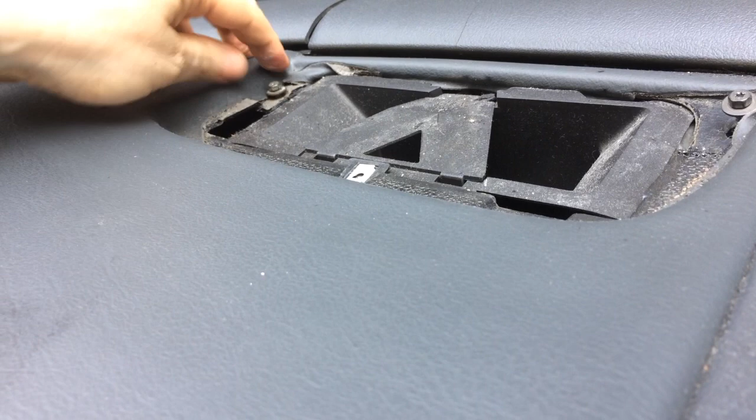I'll get these the rest of the way out myself in a minute, but you get the idea. I'm going to remove these two here, and then on the side out here there's a panel we're going to remove. That access panel just comes off, and that's going to give us access to this Torx screw here.

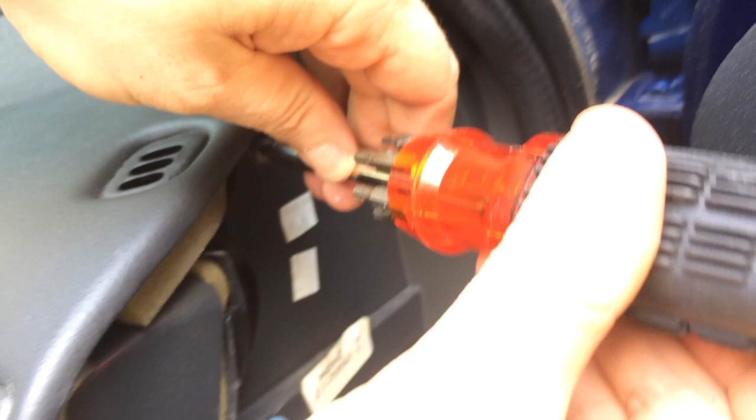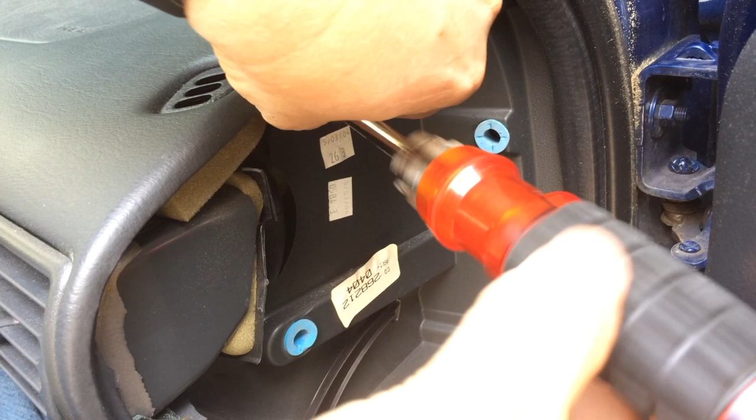Then we're going to do the same thing on the driver's side with respect to taking off this access panel and removing the Torx screw that you find there. I'm not necessarily going to show you that side, I'll show it to you after I'm done. I'm going to remove that panel on the driver's side, take the screw off over there, finish taking the two I loosened up over here, and then we'll come back because we're going to proceed into the glove box next.

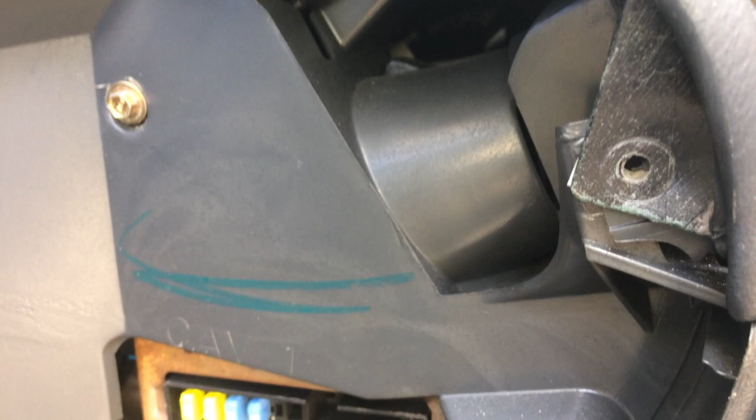Okay, this is just a view from the driver's side. When you come in here, you'll notice there's a screw here and a screw here. It's this one on the edge that you want to take off, because we're trying to get where we can lift this panel up. So I've got this guy out.

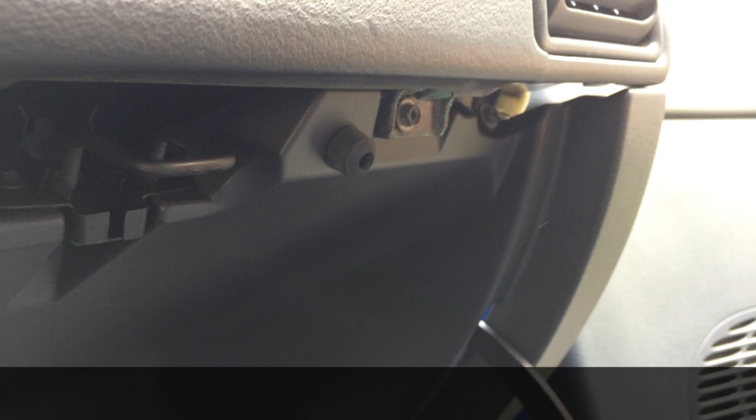Now we're going to proceed into the glove box area. In the glove box, there's a couple of screws we're going to remove, right here and here. There's one directly under this AC vent, and one right next to it to the left. Again, we can use our T15 socket to get these out.

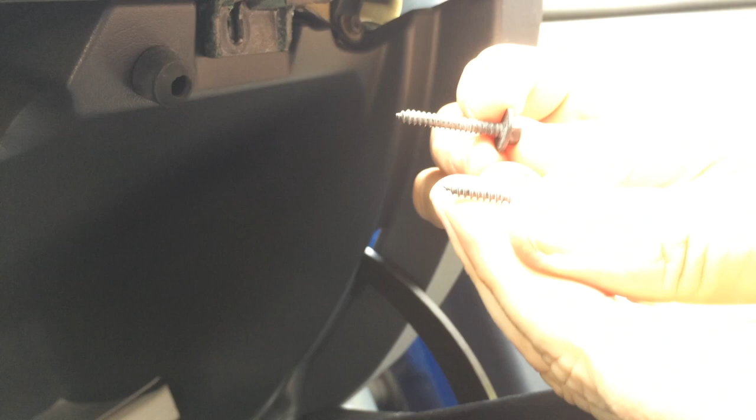Before I forget, after I get these guys out, I didn't show you when I finally removed those ones on the upper dash. When they come off the upper dash, the one on the right is the longer one, and the one on the left is the shorter one. Again, these were the ones that came from the upper defroster duct on the dash.

All right, so this guy's off, and now we're going to take this guy off. Now you don't have to use a T15 here, you could throw a socket on these. They are hex-headed screws.

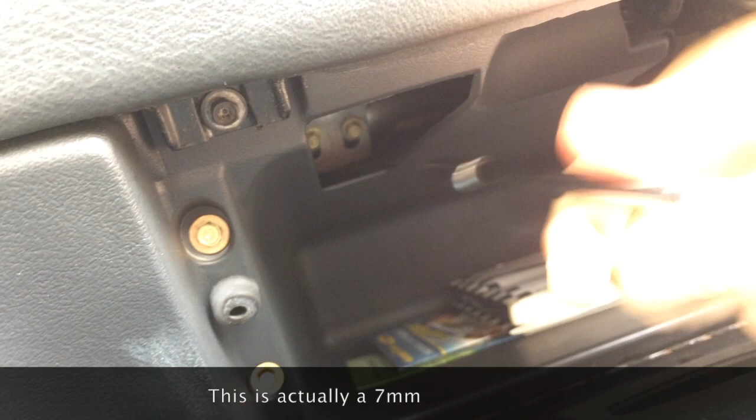All right, now with that out of the way, there's a couple of bolts that are right here, 7mm, 1 and 2, and these are the next two we're going to want to take off. I thought I had the right size socket on here, but I didn't, so let me go change my socket and we'll come back.

All right guys, I misread that. It's a 7mm socket, so I just had to change from the one I had to a 7.

Now, I'm not going to take these all the way out because I'm filming and I can't see them well with the camera in front of them, and I don't want them to fall behind here. So I'm just going to loosen them up, then stop the camera and get in here to take them out by hand. I've got a little magnet in case I drop them so I can fish them out. All right, that's the deal here. We're going to take these two guys off.

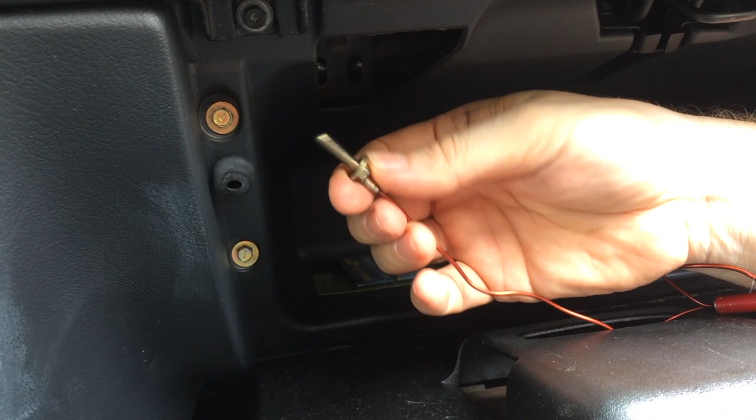So all right, guys, I've got this out. Basically what I do is loosen it up by hand, and as I take it off I use a remote magnet to hold onto it, just to make sure it doesn't fall back behind the dash. All right, so with that taken care of, the next step is to remove this top piece.

And I've got my prying tool that I'm going to use to do that. It's basically just some little latches that you pry up. You can see them right here, these little studs, and they go into these little holes. Again, we just want to go nice and slow because of how everything's kind of cracked from the plastic over the years.

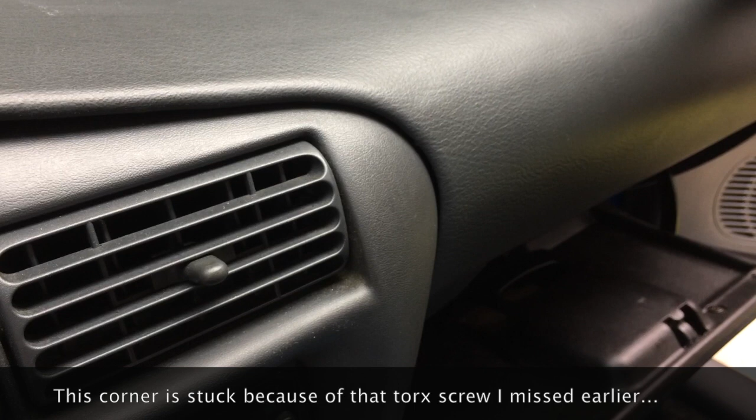This side's loose over here, and whoops, I did forget one screw on the far left above the glove box entry. So whenever you're doing something like this and it feels hard or stuck, I never force it. I always just go slow, and if I feel resistance, it probably means, like what I just saw, that I forgot something.

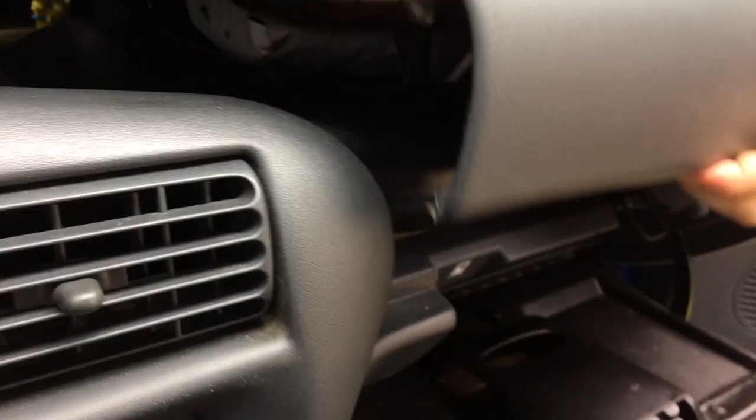Okay, so got almost all of these out. There we go, last one. So we're going to take this whole dash piece off and set it aside out of the vehicle.

And then with this out of the way, we're finally almost in a position where we can get at what we need to get at here, which is this front piece. Now this guy's held in by some additional screws. You can see one of them right here, and again it's the same kind of T15 deal. So I'm going to remove this guy.

And then we just have to go around and see which other ones we have to remove like that. There's going to be some more clips, and there's another one right up here on top.

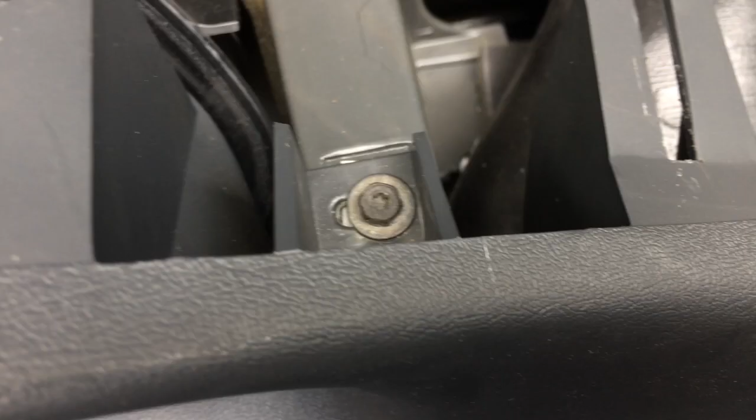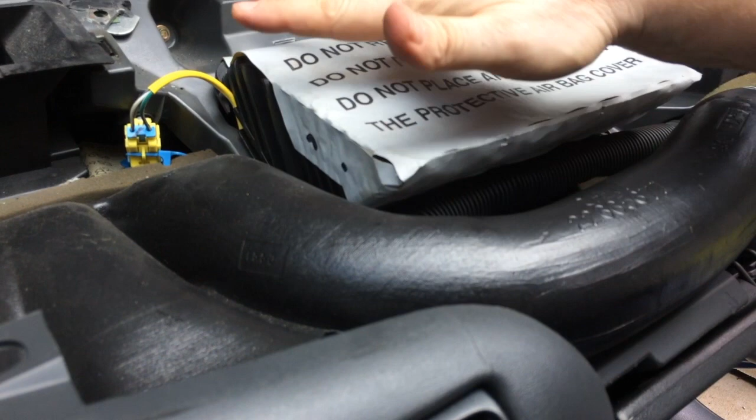Another thing I'd tell you while you're in here, I didn't disconnect the battery because you don't normally need to bother with it on this procedure, but make sure you stay away from this passenger side airbag. Don't leave any tools on it, don't lay anything on it that might trigger it. Just a good best practice.

All right, so now I'm going to come over on the other side and see if we have another screw holding this piece on. And yes, we do, right here in the corner. In the far corner, there's one more. Okay, and with that guy out of the way, we should be able to remove this trim piece and get access. Yep.

Okay, so now actually comes the hard part. You're going to have to reach behind here, and I'm not going to be able to show this very easily. I'm going to have to reach behind here and disconnect the headlight dimmer switch and the cigarette lighter. So let me pause for a second and get those disconnected.

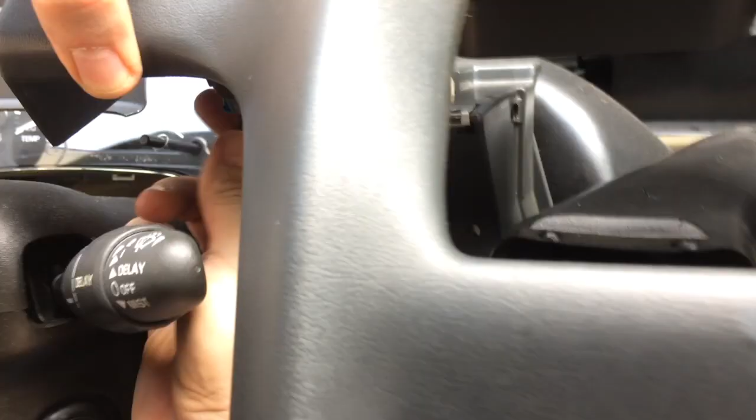All right, guys, I got the dimmer switch off here. The last thing left is this cigarette lighter. I've popped it out of the bottom clips here and here for this piece. And then with this guy, when you've got it in this position, there's a little knob on top, or a little lever, you just give it a squeeze. Right, you'll feel it right there, right? This guy right here, and he comes out.

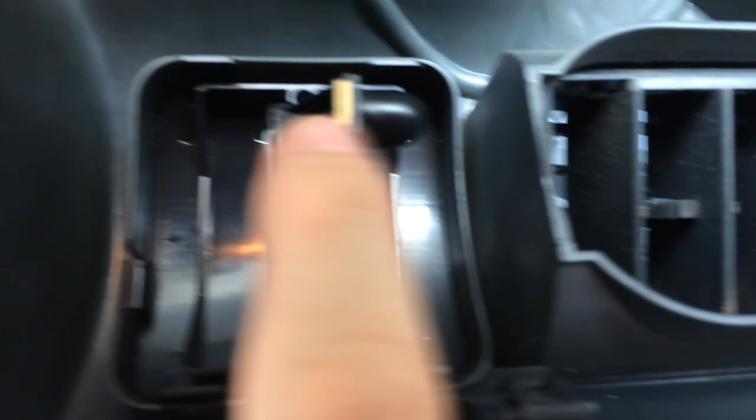And with that out of the way, you can remove this. The way I got the dimmer switch to release, if you look at the other side here, you can see this little clip. There's a notch on this card edge connector, this guy right here. All you do is lift that notch up very carefully so you don't break it, so you can clear the little tab that's retaining it. And this guy will come right unplugged, because it's literally like an old-fashioned card edge connector. I don't know if you can still see this, but that's the deal here.

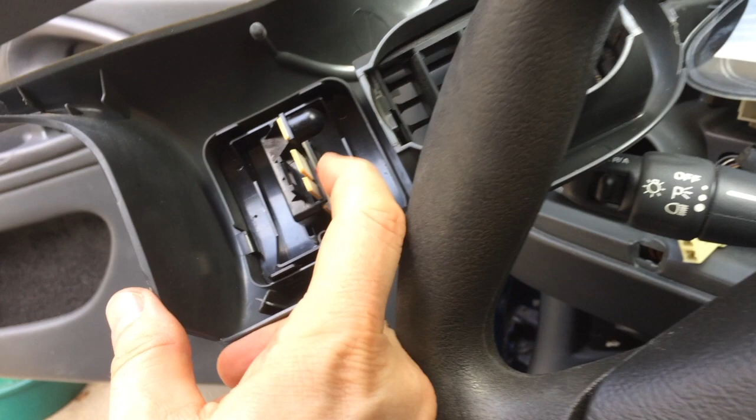All right, so this guy we're also going to set aside away from the vehicle. And again, be super careful. As I was taking this off, I noticed it's got the beginning of a little crack starting right there, and I managed to not break it or cause it to get any worse. So it's just part of what's going on with these Cavaliers when they get this old.

All right, so all we have left to get the radio out is we've got 2 screws here and 1 screw here. So let me set this dash panel aside and we'll pull the radio. All right, let's take this set of screws off so we can finally get this radio out.

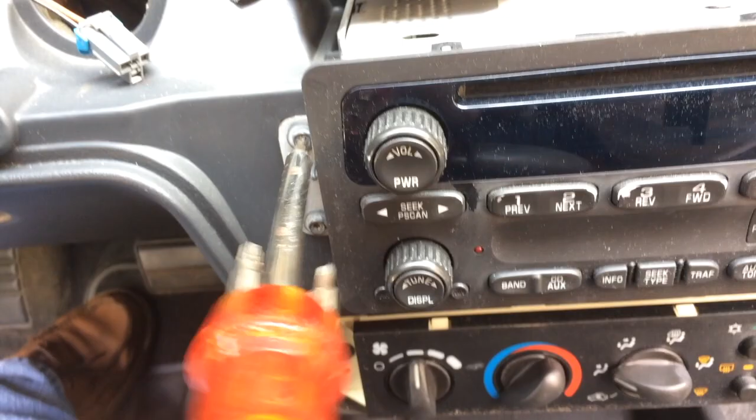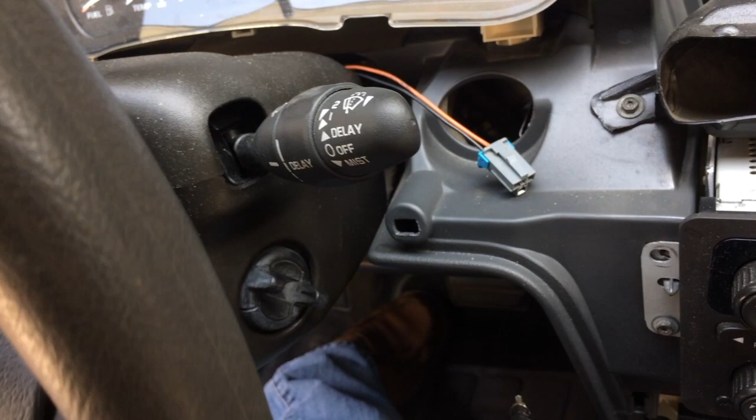Another thing I didn't mention on the previous piece: when you're getting ready to remove this dash piece, if you've got a tilt wheel, go ahead and tilt it all the way down. Makes it a little bit easier to get the clearance and put less stress on that plastic.

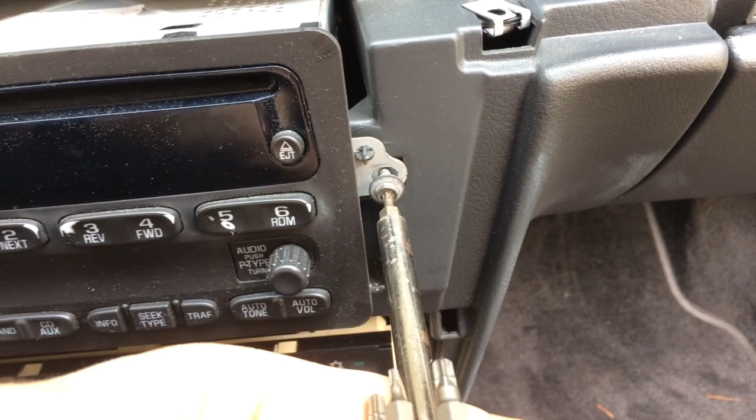All right, so this guy is almost out here. And we got this guy. This is the factory original radio from 2004. It's like the mid-range radio.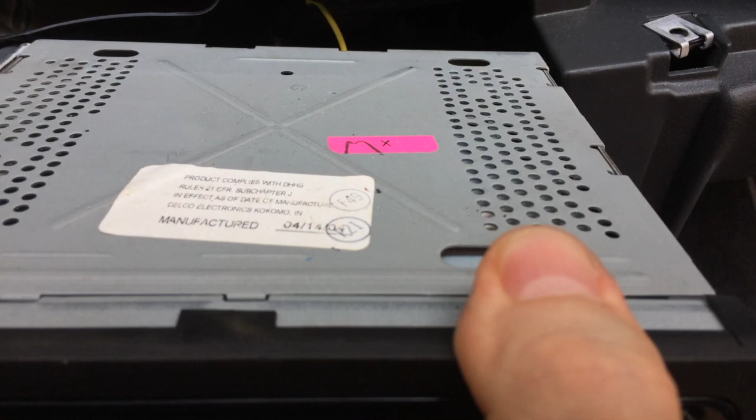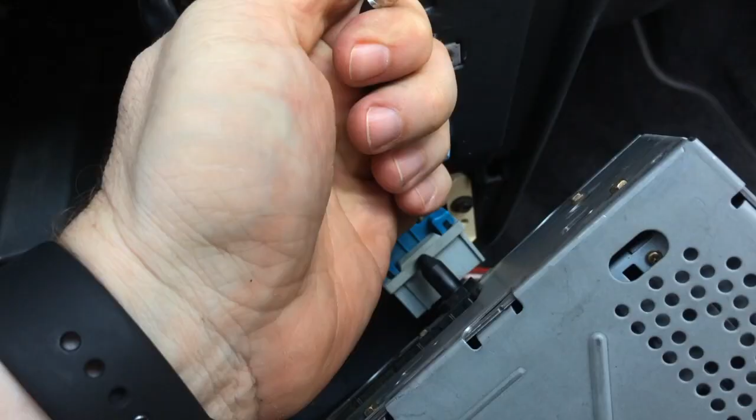Okay, this guy comes off, and then the owner of this vehicle actually has a third-party attachment here in the back. Let me just get this stuff unplugged first. You just give these guys a squeeze, just like you see here, and they come off. And then the antenna just pulls straight off like that. That's the same kind of connector since like the 1940s, no change at all.

So what we have here is the owner has gotten a device that plugs into the back of the radio that is used to allow you to have an auxiliary input. And we're going to have to remove this, because you can't have anything like this plugged in while you're trying to unlock the radio.

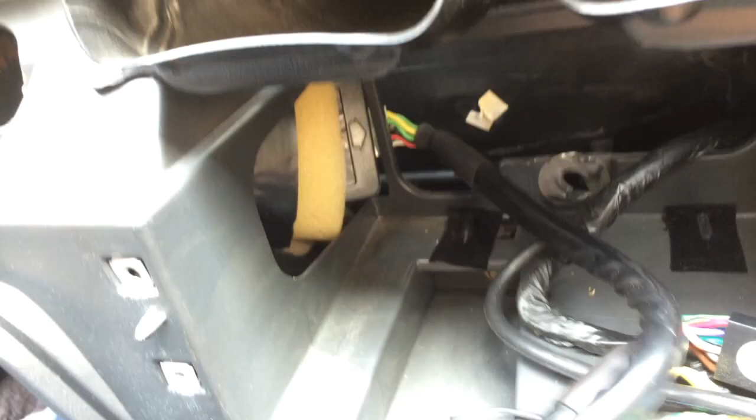We're going to be using a Tech2 GM tool today. This thing's wedged in there pretty good, I have to figure out how I can get in there and get it out. But we're going to unhook this so that we just go back to the original harness.

It looks like this guy is spliced in here. I thought it was just a plug-in kind of thing. Well, we may have to just leave it unplugged like this and just leave it be to get it hooked up. I'll have to take a look at what this is, because this isn't a factory deal here.

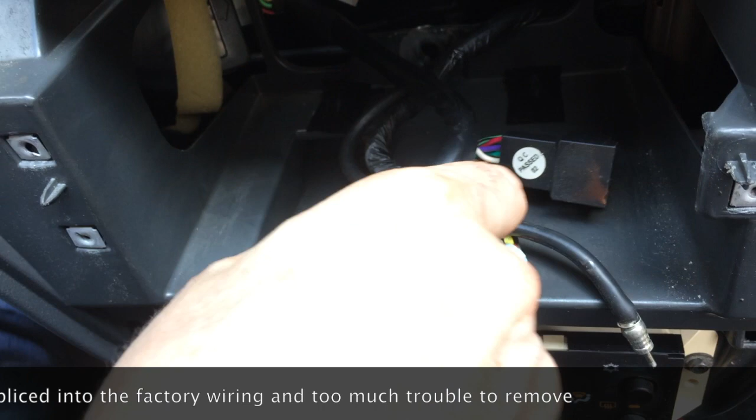All right, so let's take a look at this radio alongside the new radio and we'll talk about what we're going to do. All right guys, before we put this new radio in, I want to show you some information about how to pick the right upgrade radio.

I'm going to go to something called the GM Heritage Center, and I'm on Google here. This is all you need to do here for Cavaliers. The GM Heritage Center is for car collectors and people restoring classic cars or older cars, they archive information. This is a 2004 Cavalier, and 2003, 4, and 5 are the same model series, actually the last run of the Cavalier.

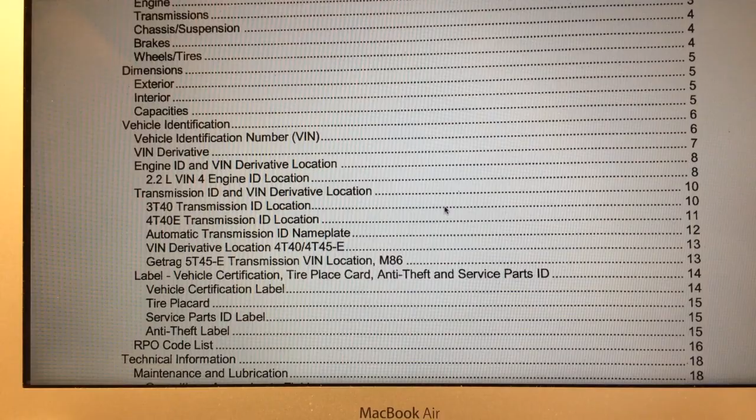So I'm going to pull up the 2005 Cavalier package. This package has all kinds of information about the Cavalier, and what we're particularly interested in is the radio options. In order to be able to unlock this stuff using a GM Tech2, we have to use a radio that was originally available at the time the vehicle was in production.

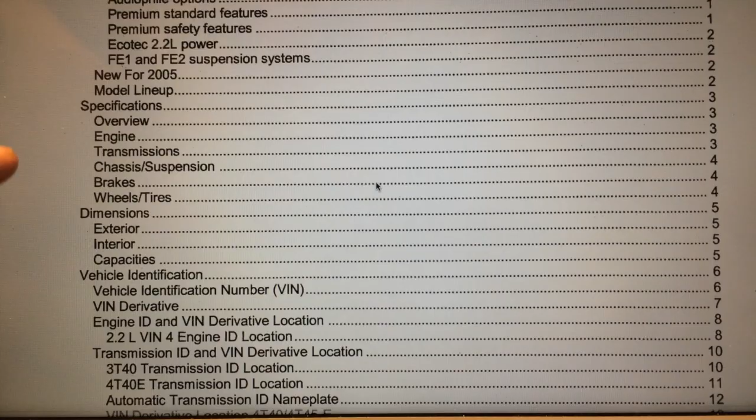So what we're looking for here is where the RPO codes are. Here it is, the RPO code list. RPO stands for Regular Production Option, and these are the codes that were used by the dealer to place an order for the vehicle, either one that they ordered themselves and you bought off the lot, or that they ordered for you.

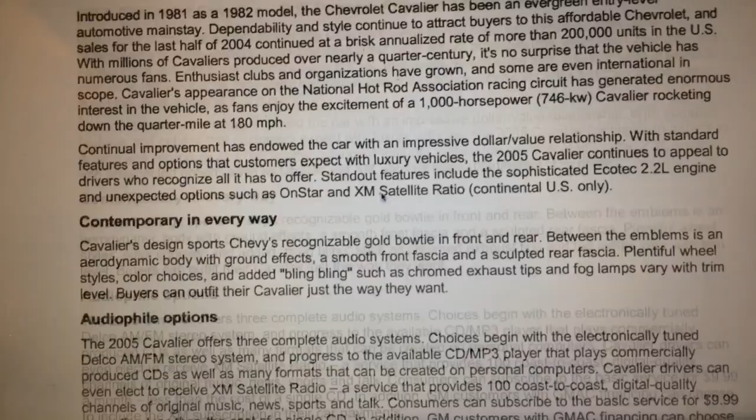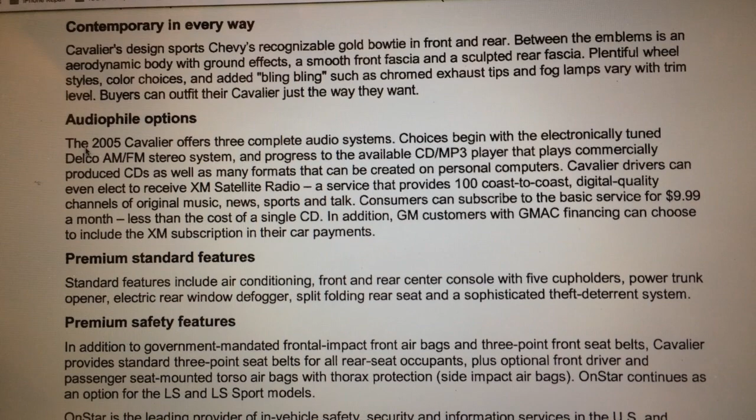So I'm going to come down here, I also should see in the introduction section a little bit of information about the radio itself. Here we go, Audiophile options. The 05 was the last year of this series, and this one would be compatible. So they tell us there's 3 radios that were offered: a plain Jane AM/FM, an AM/FM that has a CD player, and then there's an AM/FM CD with an MP3 player. So those are the 3 tiers.

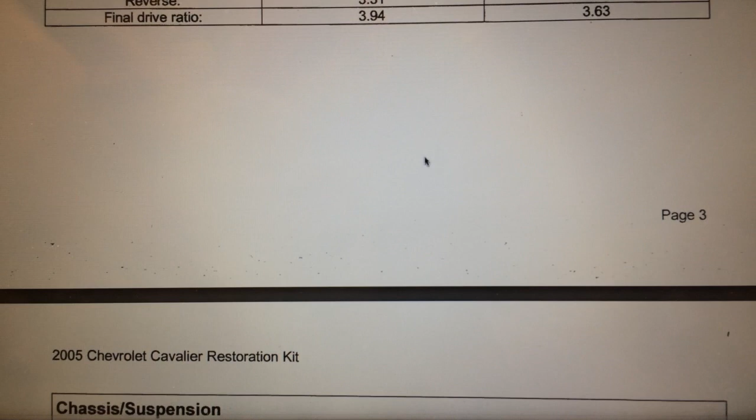If we take a look at the actual options, we don't count XM radio, that would be something you'd see called a digital radio receiver or something of that nature. We're just looking at standard radio. We're going to go down to page 16 here of the RPO list. Just give me a moment to find it... scrolling really slow... here we go. This is the RPO list, right? These are all the options on the vehicle, all kinds of stuff.

We are interested in the radios, which are going to start around letter U. Okay, so there's actually a mistake on this. UL5 is actually radio delete, meaning the person ordered the car with no radio. That's something you might see on a fleet vehicle or a government vehicle.

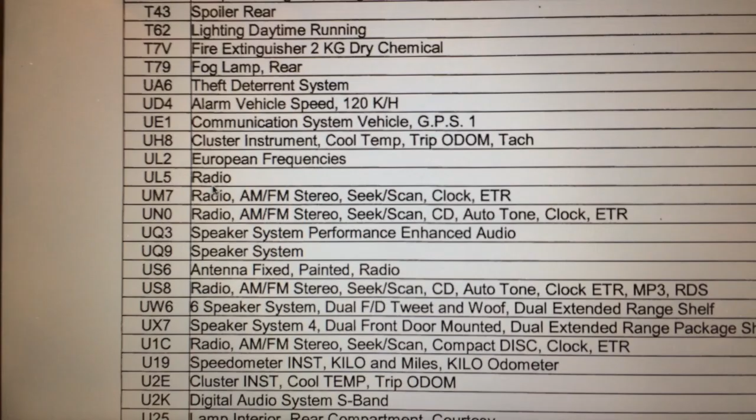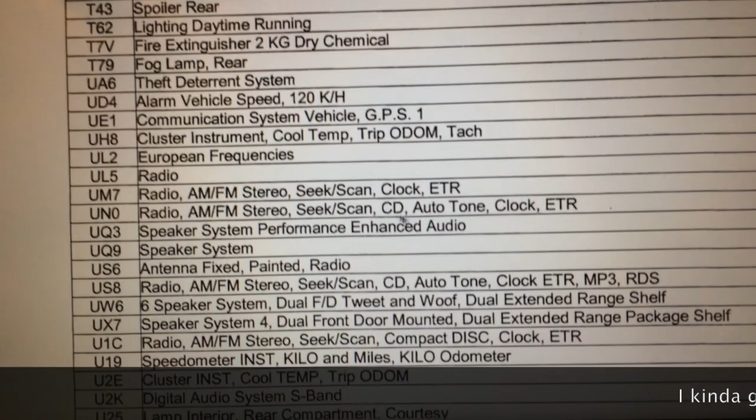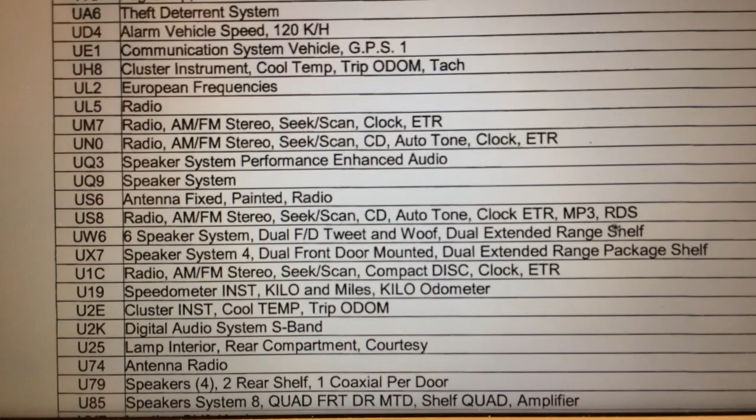Then we see UM7, which is a standard AM/FM stereo, and UN0, which is AM/FM stereo with a CD. We see a few speaker options and the radio antenna that sits on the back quarter panel. Here we see US8, the top radio: AM/FM stereo, CD, and MP3 capable. So US8, UN0, and UM7 are the 3 types of radios.

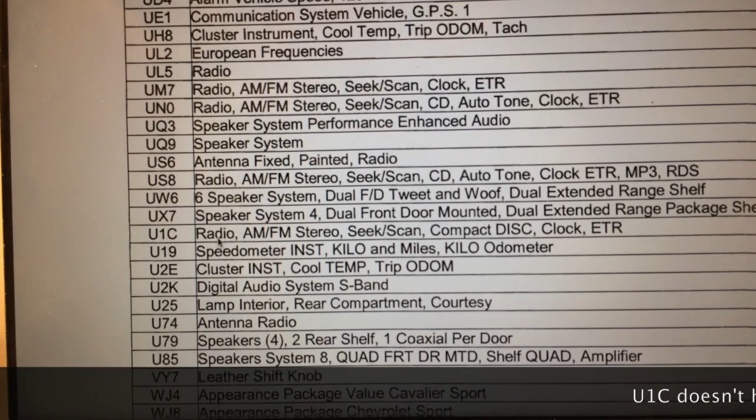Now you'll see sometimes some other radios listed, and you'll notice they'll end up having the same description. This U1C is actually the same description as UN0, so it doesn't count as a separate radio. Digital audio is our XM radio receiver, if the vehicle had that.

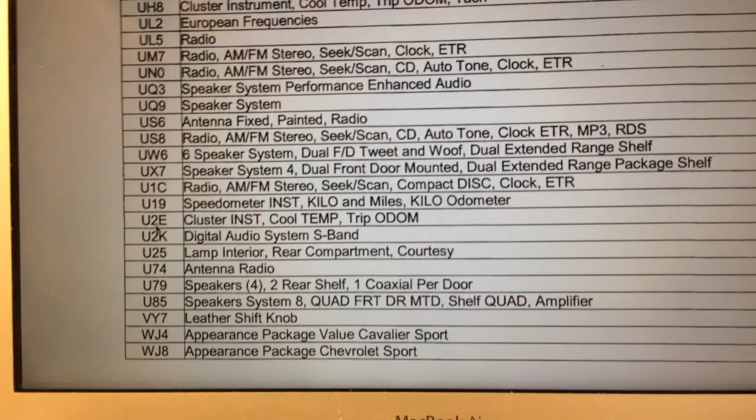So now we've got what we need. Why do we want these codes? Well, we've got to find part numbers to order the radios. I like to use GM Parts Giant for this kind of stuff, and now knowing the options, I can see the different radio part numbers.

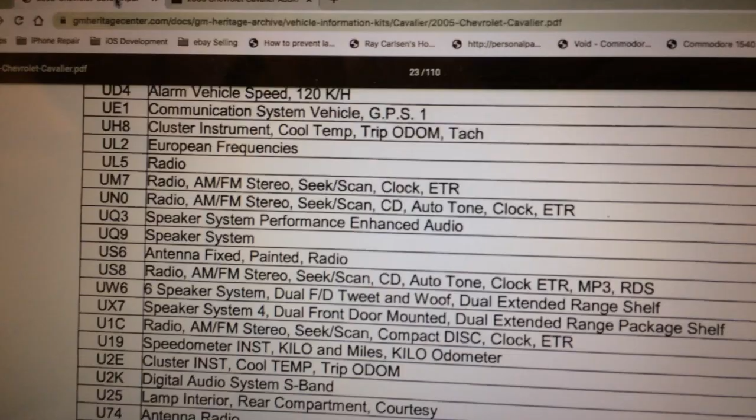So here's a US8 radio, part number 103-48717. This was the top of the line radio, right? So if we go back to our RPOs, we know US8 was our top of the line MP3 player radio.

And if we want to see where our UM7 and UN0 radios are, here's the UM7. Here's UN0, and I'm looking at UN0 here. I'm sorry, I read it wrong—UN0, that's what I was looking at. So we've mapped all 3 RPOs, UN0, UM7, and US8, to part numbers.

So now if we take a look at the radio that came out of the vehicle, we can see that this is part number 103-35223. Now sometimes you'll find these numbers don't match up to what's over here.

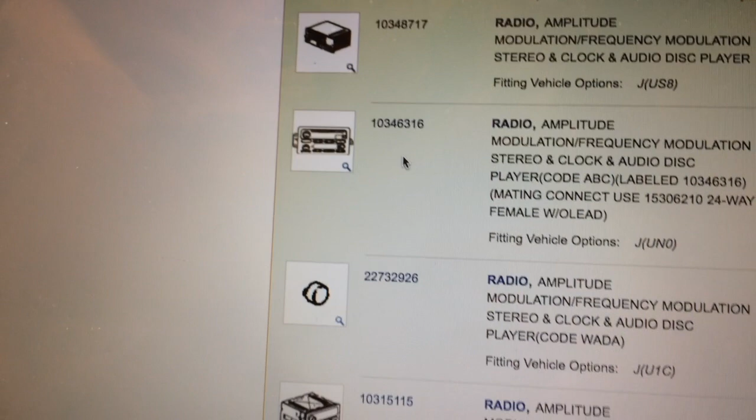So I know that this is the mid-level radio because it has a CD player, and they're showing a 103-46316. This is a superseded number. This is the original number that went into the radio, put in there back in April of 2004 when it was manufactured by Delco Electronics.

And so this radio number has just been superseded. You now know that this number and this number are compatible with this vehicle. There may even be numbers in between. The people that sell these radios, if you buy them from somebody that does it as a business, they'll have a lot of familiarity on the right radio for you. But the important thing is to get the one that matches.

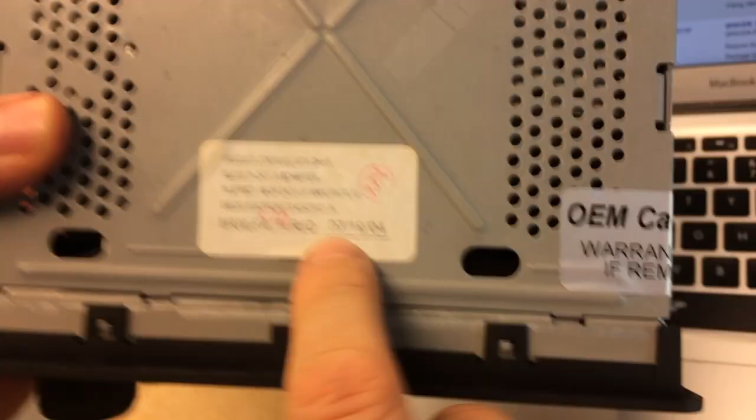Let's take a look at the radio I picked to do the upgrade. This is the top-end MP3 type radio, and this one has a part number of 103-48717, and that's exactly what we see on the screen. So in the case of the top-line radio, this one has never changed. The manufacturing date on this is July 19th of 2004.

So it could have either been a late production '04 radio or an early production 2005 radio. But the point is, it's a supported radio. And again, so why do we go through this? These are the only radios you can put in this vehicle.

If you pick a radio from a Buick, if you pick a radio from a Cadillac, even if it fits, you will not be able to unlock it with a Tech2. Because the Tech2 is only going to have the programming to deal with the radios that came with the vehicle brand new. The only way you'll luck out is when you have a situation like this, where there's more than one part number used for the same radio.

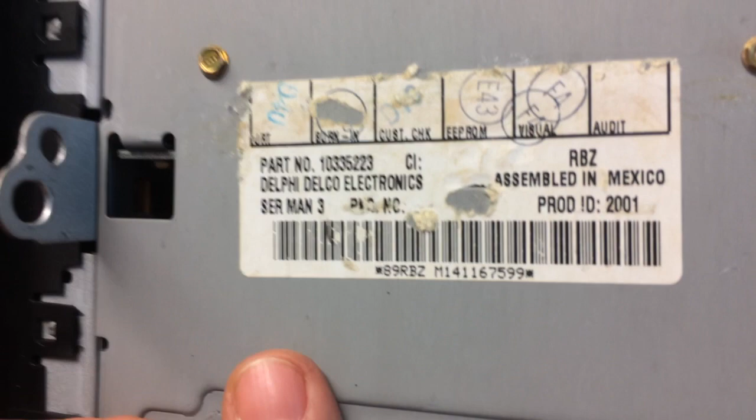Now, GM might have changed that part number because maybe they changed some kind of chips inside of it, maybe they changed the bracket, maybe they changed something with the supplier of the faceplate. Something triggered a different number for Delco Electronics to change to a new number, but it ends up being the same, and the Tech2 will be able to handle it and program it.

So anyway, what we're going to do now is put this new radio in. We're going to get the whole thing put back together. I'm not going to show all that because all you do is reverse what we already showed. And then we'll be sitting on a situation where this radio is going to say it's locked, and now we're going to show you how to unlock it. So we'll come back when we're at that point.

All right, guys, we've got the radio installed. We've put all the trim pieces back on. Like I said, I wasn't going to show that because you guys could follow along just by reversing what we did. And when you turn the radio on, I was expecting to get a lock error, but instead I'm getting a calibration error. So you can get both types of problems—sometimes it'll say locked, and in this case, it's saying calibration error.

Because it didn't come up with what I expected, I'm going to show you both things that you can do on the Tech2 to get around that.

Before I get started, let me tell you also that third-party device that was in there is tied to letting you have an auxiliary in for your iPod. Basically what that thing is, it plugs in the back there, and if you cycle through the band with the radio on, it'll give you an aux in. It's a pretty cool little device from the early 2000s, but I decided just to leave it in there because it was spliced in.

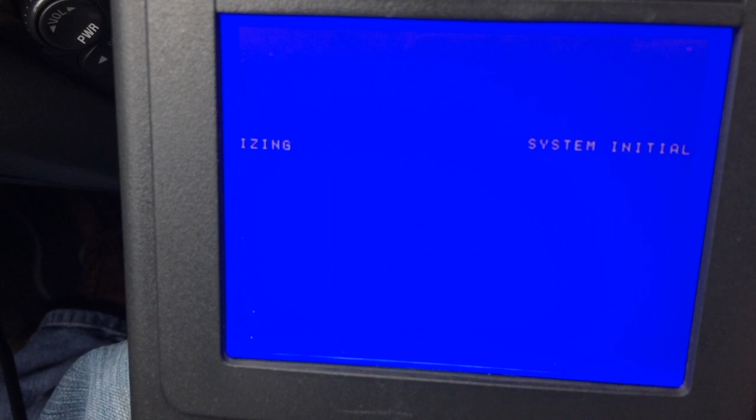I'm going to turn the key, not going to start the engine, but I'm going to turn it to the run position so that we get our dash lights and everything. Then I'm going to power up our Tech2. Hopefully we don't have any glare here. Let me kind of turn it a little bit so it's got a better orientation for you.

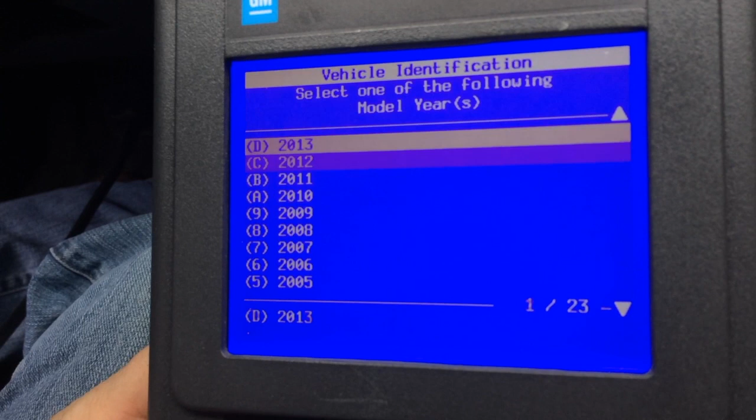And we're going to go into diagnostics. This is a 2004. It's a passenger car. It's a Chevrolet, a J model. If you don't know how to pick this on your vehicle, I'll link another video at the top that shows you how to pick those codes. And of course, it's a Cavalier.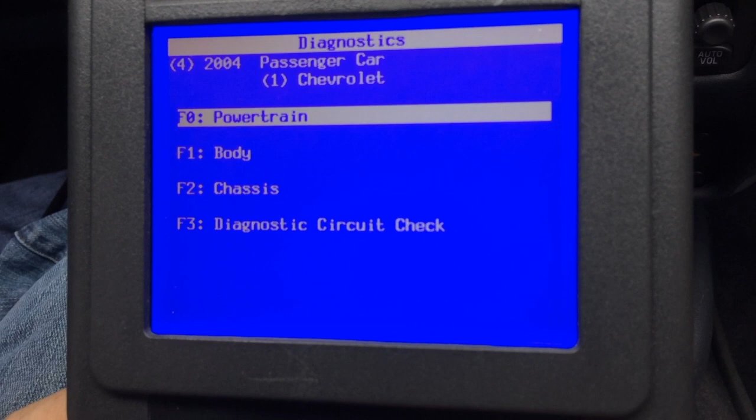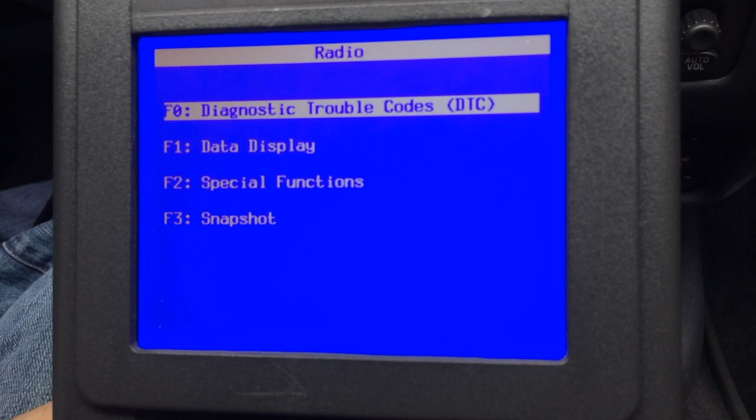What I'm going to look at first is, if I had the lock, what would I do for that? I believe that's under the body. We don't have a digital radio receiver, but it thinks we do because we have that thing plugged in that does the aux in. We would go down to radio, then special functions, then radio setup.

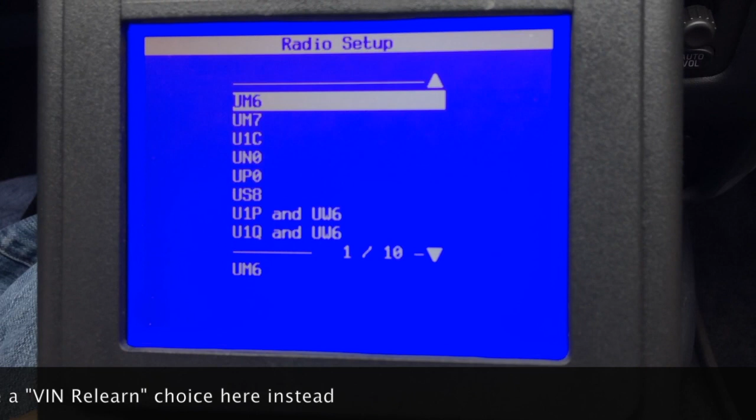Then we would have to pick what kind of radio we have. Remember I showed you guys how we picked the RPOs—that's one of the other reasons why we did this. So this is a US8 radio, so we're going to pick that.

It's United States. It's doing a test of the radio, making sure that it can talk to it. This is basically the body control module communicating with the radio's module inside of it.

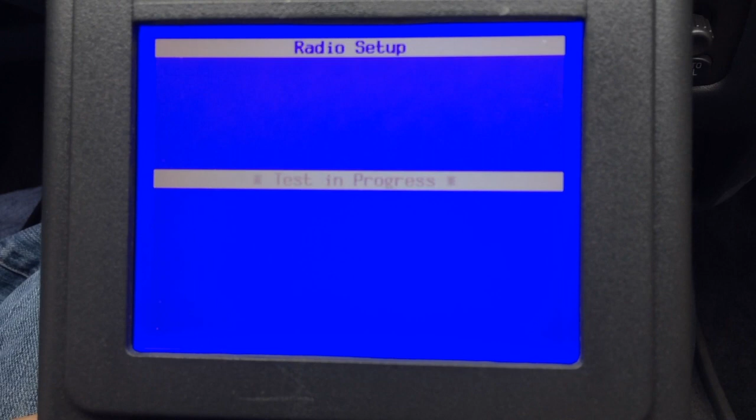Just let it chug along. We're not programming anything yet, we're just running a setup test. Okay, the test is successful. That's great—that means that aux-in thing isn't causing us any problems, and the BCM can talk to the radio just fine.

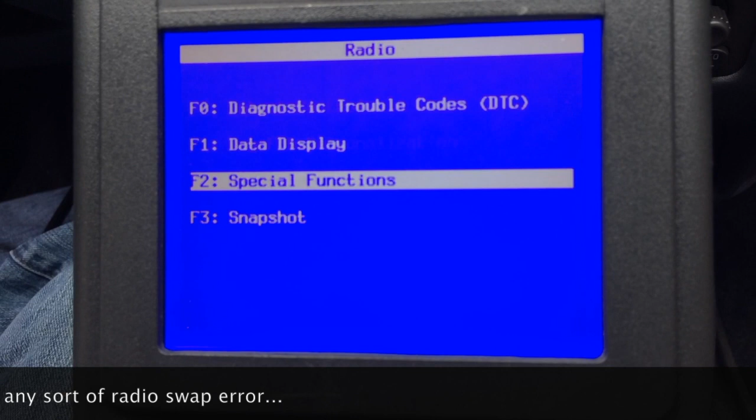So now I'm going to exit out of this. Now the radio is set up. That doesn't necessarily clear the error, and it doesn't necessarily get rid of the problem, but it's something we should do when we're coming in to do something like this.

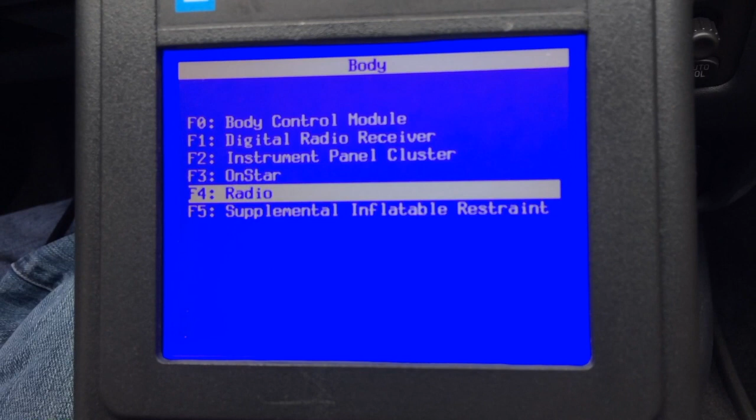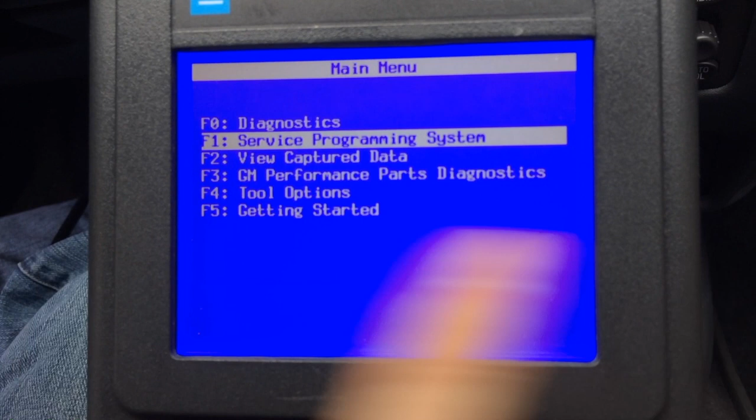So now, how would I calibrate it? I'm going to go all the way back to the top, and I'm going to go into the service programming system. I've got another video on this in general—I'll see if I can link that up here at the top too, because I'm not going to spend as much time on what this is.

I'm basically going to go into this. I'm going to request information from the body control module to read in from it, and at the same time that'll pull up the information about the radio.

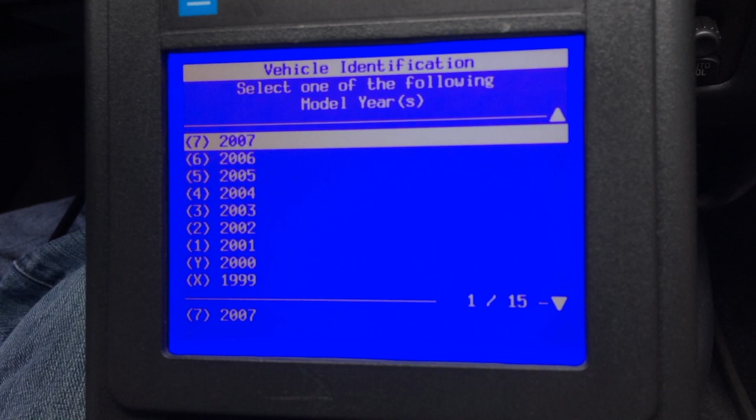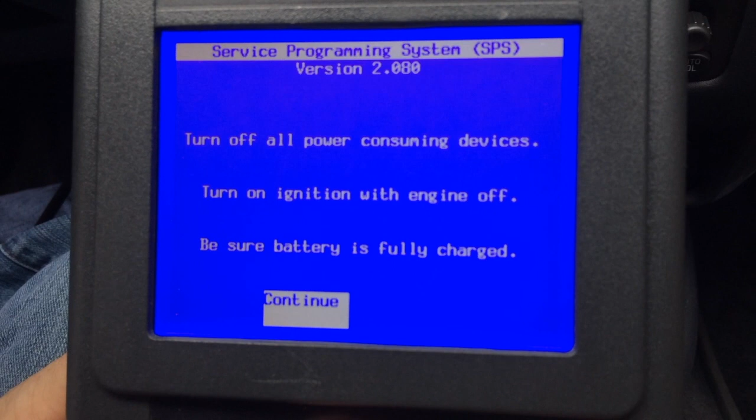So it's a Chevrolet, it's a 2004, it's a passenger car, it's a Cavalier. It's gasoline powered. We do have the ignition on. Battery's in good shape. We're not programming anything yet, so we don't have to worry about putting any kind of auxiliary power on the battery. It's going to read our VIN.

I'm going to gray that out, but I'm going to tell it it's yes.

All right, so now we're going to do what it says. We're going to disconnect this. We've downloaded all this information, and it's in the Tech2. Now we're going to go over to our TechLine terminal, which is basically a PC running the TIS 2000 software.

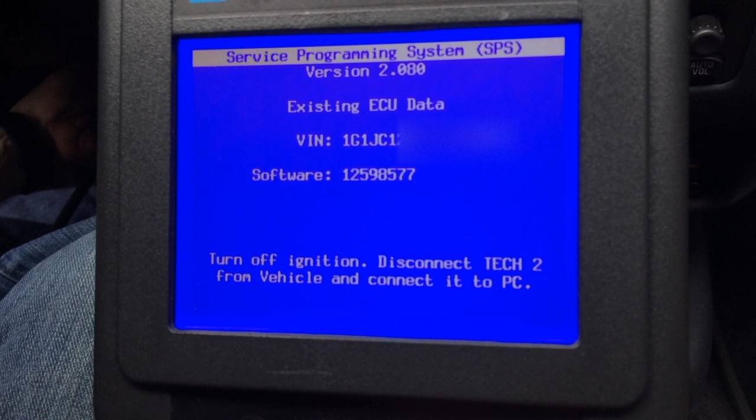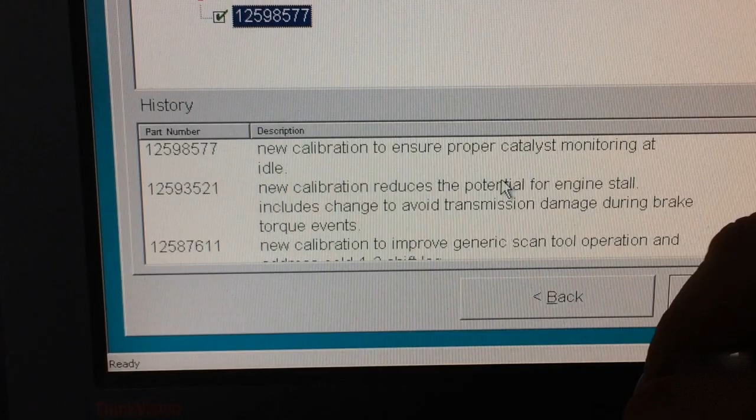We're going to see if we got a new calibration for this radio. Okay guys, we're in the Tech2's TIS 2000 screen, sitting on this old Windows PC I use for that purpose, and we can see there's no newer calibration than the one currently installed here. This is too old of a vehicle to have separate calibrations for the radio. It's just basically one thing for everything, and that's what it uses to talk with.

Let me just get rid of this little antivirus pop-up that sprung up here. So we're going to go to the next screen. It's going to basically tell us we've already got this. It's telling us, look, you already have this calibration, you can't update it. But by going through the procedure we just went through and figuring out that it's the same, I believe it's going to be enough to get the radio happy with it.

So we're going to try that. At this point, we're going to go back in the vehicle and complete the process and see if it triggers the radio to figure out that I get it, I know what I'm supposed to be doing. So we're going to go back to the car now.

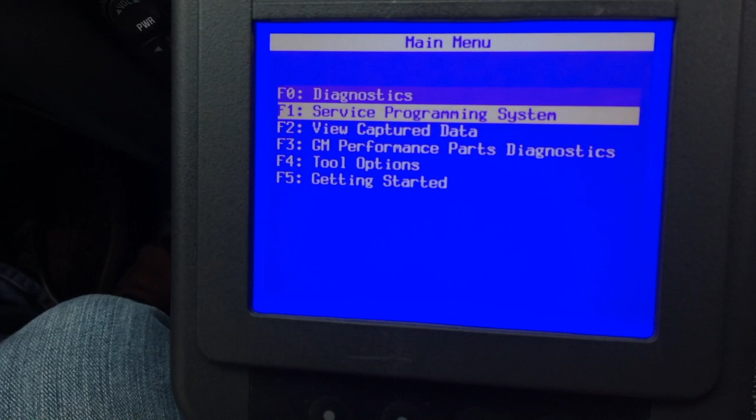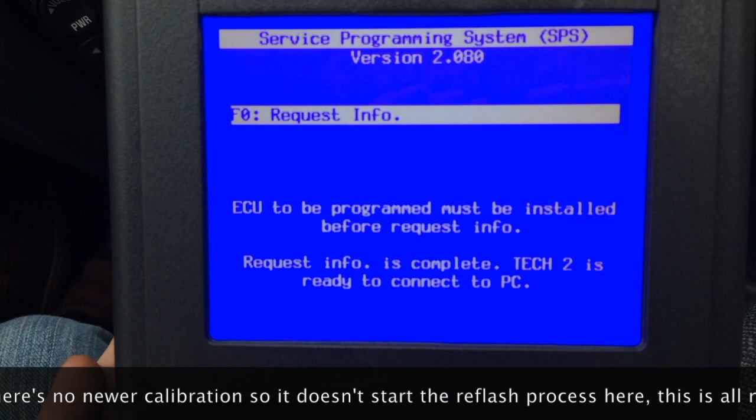Okay, we're going to go back into the SPS system. We know there's no newer calibration because we requested this information already and went over to the PC, and it told us there's no new calibration you can apply. So we don't need to request this again, we just need to go into this step. If we did have a newer calibration, you guys can watch the video I linked earlier and you can see how that would be applied to the body control module, the engine control module, whichever ones needed to be updated. So we don't have it, so we're done at this point. I'm going to exit out.

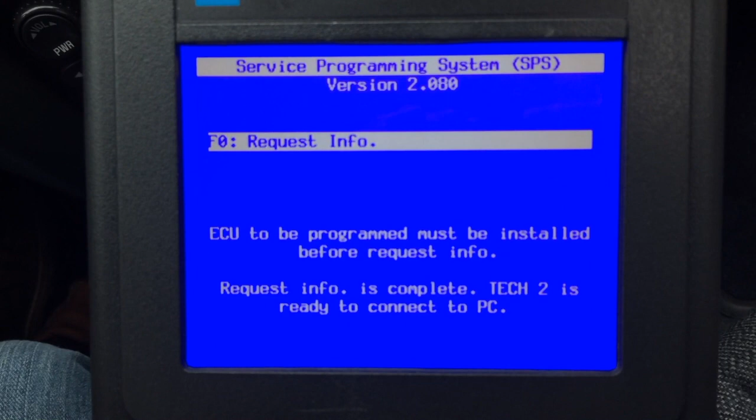And I think at this stage, if I power off my Tech2, and I kill the radio here, and I start the engine now, I should not have that calibration error. And I don't.

All right, so that fixed that problem. And then I still have this third-party guy, I'm going to still make sure he still works. If I pick him, he still says aux in. All right, so everything looks like it's working now.

So running that setup and going through the process of a calibration update and figuring out that there was not a newer one was enough to get that calibration error cleared. If this had said it was locked, we would have been able to use the same process to unlock the radio by applying a new program, which GM calls a calibration. That would have cleared the lock message as well. So the same process I showed you for the CAL error would apply to the lock message.

That's only for these RDS radios - I'm showing you in a Cavalier, but it'd be the same in a Sunfire, the same in anything from probably 2000 to 2005. If the radio looks like this, the form factor, the shape and the size, it's probably the same procedure. Some vehicles have an unlock feature built into the Tech2's menu. This one does not, so this is the process you would use with this type of radio.

And this is just another way you can do this without opening up the radio and trying to lift off the EEPROM chip. You'll see some videos about how to butcher the circuit board and either pull a leg up or remove that chip altogether. This is the way you're supposed to do it, the way GM intended. And if you have the equipment or access to the equipment, this video is to show you how.